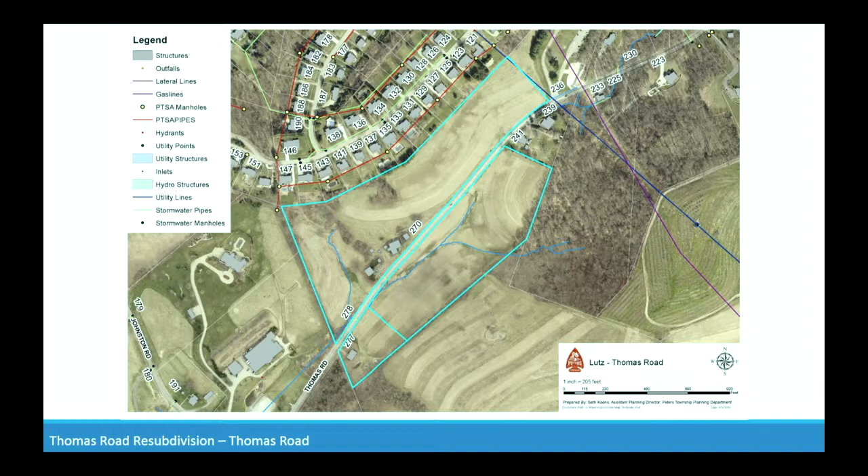Ted Taylor recently purchased the 27.75 acres. This property here, which is lot 2 on the plan, is owned by Wesley Lutz's daughter, Sandra Triplett. This plan simply combines 2 acres off of the larger Lutz tract with the former Wesley Lutz home. The plan is for that home to be torn down and a new home built on the resulting 4 acres.

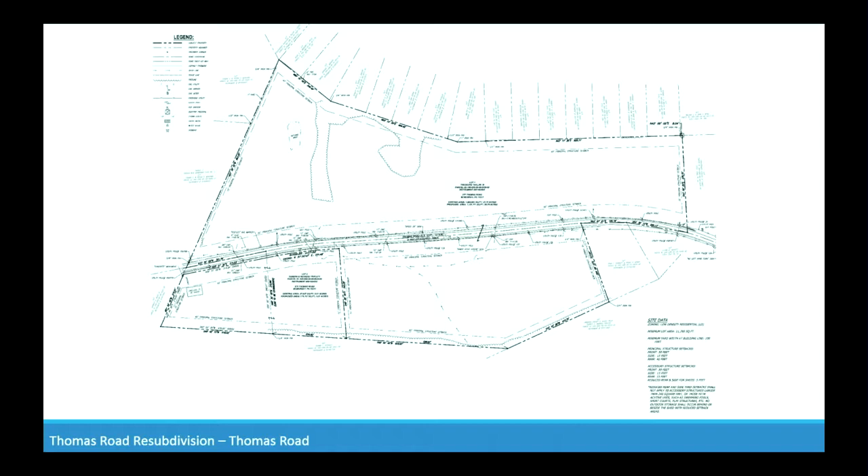Staff is recommending that the Planning Commission recommend council approve it, subject to the 8 conditions listed in my report.

Any audience comments on this matter? Any commissioners' comments? Are they going to continue to use a septic system, or do they have to tap into a pumping system? I think the plan at this point is to use the existing septic system, which has recently been checked out by the Washington County Sewage Council and found to be working properly.

But maybe Caleb or Mr. McLaughlin, who's here tonight, can say whether they plan on tapping that into the sewer. It sounds like it's working fine, but I don't know the answer to that. Did I answer it right? Yes. So there's no requirement that new construction means they have to tap in? No, as long as that existing system is working, they can continue to use it. Okay. But the future plan for the Ted Taylor property, is that serviced by sewage? That will have public sewer.

That will. Now, when that's created, could we require the new homeowner to get public sewer rather than a septic system? I don't know that we can require it, but there is a rule that if the new sewer comes within, I'll say 150 feet of the new home, then I think it's required to tap in. That's from the Peters Township sanitary code. Okay, gotcha.

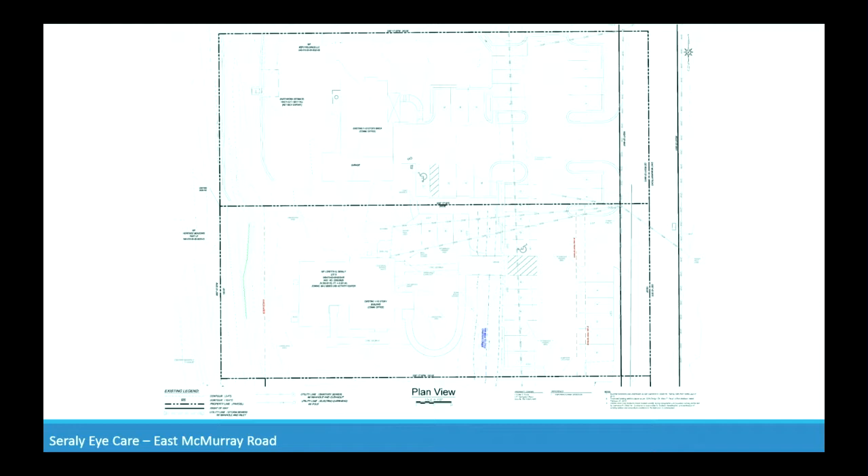There's a skin doctor and an eye care doctor located on the parcels. As you can see on the existing conditions plan, they're right up next to one another along East McMurray Road. We're looking here at this most northern parcel for the majority of this application.

What they're proposing is an expansion of the existing parking lot to allow for 9 additional parking spaces at 57 degrees along the backside of the building, with a buffer between the parking and the adjacent property line, which is also zoned mixed-use activity district. A little bit of that parking expansion would then cross over onto the address for 222 East McMurray and tie into their existing parking, creating a one-way circulation in this direction.

Staff is recommending approval of the application subject to our 10 conditions in the staff report. The applicant and their engineer received a copy of the review comments from Gateway Engineers as of this morning, so they have to look through those and finalize their plan per those comments. They've already addressed the majority of staff's comments based on the review letter we provided about a week ago, so we're moving right along with them, but we are recommending approval based on our 10 conditions. The applicant's engineer is here to answer any questions.

Wasn't it about a year or so ago, when Dr. Seraly was here? I apologize, I forgot to mention that. They did receive site plan approval for the parking lot expansion, with that date in October of 2016. That approval expired, so effectively nothing proceeded from when Dr. Seraly was here — correct, this is just resuming what he started. It never effectively got done, so this is a reapproval with some minor changes.

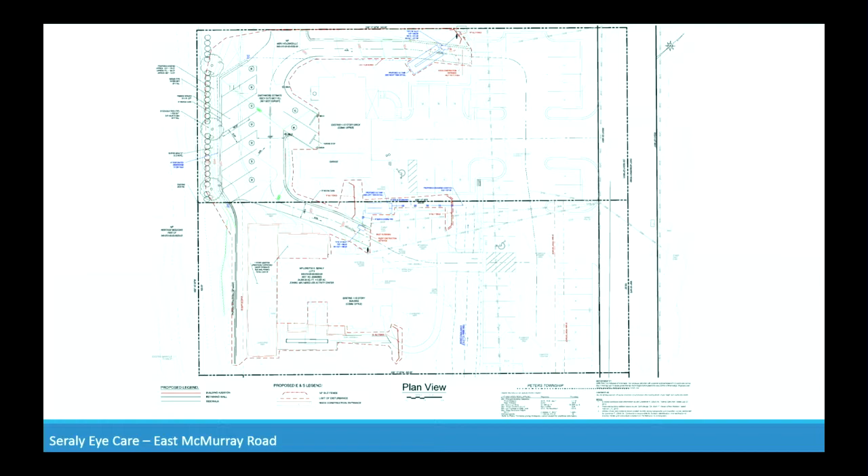Any other questions for me about the layout? The angled parking spaces, I think they're 9 by 15, 57 degrees. Is that correct size for our ordinance? On the initial plan, they were labeled at 9 by 15. They would comply, they're the 9 by 18. They meet our ordinance requirements.

And then the directional signage, is that subject to your approval? If you'll add it, then you can approve or deny that as well?

Correct. And then the 2 storm systems, were they new or were they rehabbed? They do not exist right now. They were on the original plan we got approved a year ago. We've just upsized them basically because we're handling some more areas.

Another note, we did secure a GP for the outfall on the southern tank last year, so we do have that in hand. And as of last week, I got a verbal from the Conservation District. They've approved the E&S. They asked for one more final copy of the set, so I should have that letter for you shortly.

Are you over an acre of disturbance? You're 0.51, 0.52, but no, we're well under an acre of disturbance. Yeah, and we've even included the building addition in the area of disturbance because it's happening at the same time.

Any other questions? Comments? Audience comments? Hearing none, you have a motion.

I'll make a motion that the Seraly parking lot expansion be approved according to staff's memo dated June 5th, 2019. I'll second. All in favor? Aye. Very good.

Talked about the open space. There are 2 stormwater management facilities proposed - one down close to Churchill Road and one over on the south side of the plan. Those 2 facilities will be detention facilities, they'll only have water in rain events, and they'll be turned over to the township for ownership and maintenance responsibilities.

The Westbury plan is in the Peters Creek Sanitary Authority watershed. There will be public sewer service to all the lots in the Westbury plan. The Township has approved their planning modules, and those are under review by the DEP.

I talked a bit about the geotechnical report. This is an area of Peters that has shallow mine cover, and we've worked hard with Gateway Engineers, our geotech engineer, who has worked with Westbury's geotechnical engineers, Murray Associates. I think we're all comfortable with how the site's being graded and where grouting will need to occur. There is a note on the final plan that will be recorded encouraging all future buyers to get mine subsidence insurance. Even I've learned that shallow cover or a lot of cover doesn't really matter - subsidence can occur anywhere.

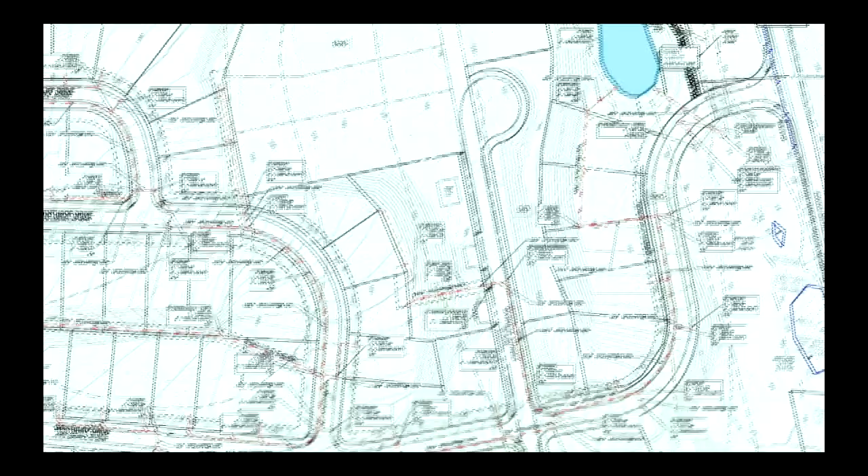Does that space have a parcel number on it? That's where it'll be - in this open space right in here. And tot lots are allowed to be within open space? Yes, just asking. We definitely encourage that.

So the area where there's going to be no houses built because of environmental purposes - how much of the open space does that take up? Is that half of it, a quarter? I'm just trying to figure out how much other space there is. It's probably a quarter of it, maybe slightly over, I'd say.

Will a school bus be able to navigate through the neighborhood? It could, but right now the idea is that the school bus will be just picking up at the end of Westbury and Churchill. The answer is yes, the school bus can.

Yes, through the plan, yes. But you're saying it will not. At this point in time, the school district is telling me they just want the school bus stop pad to be right there.

That's where they want the school bus stop to be. And how far is that for this house to walk? It's not that far, you know.

But it can, yeah, I mean it can. But that's in coordination with the school district, that's where they said it's going to be for now. School bus stops often change. Right now they're planning on right there, but I'm sure once the neighborhood's built out and parents get involved, they're gonna be picking up the kids at the door.

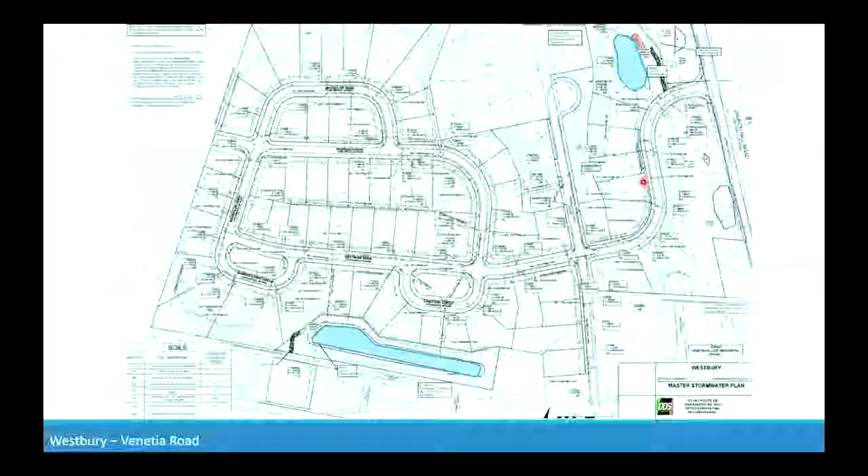And when you say the requirement now, just for my educational purposes, is 25% - is that 25% of usable land, or 25% gross of the tract that people could actually walk on? Gross, 25% gross. But the stormwater facilities can't be counted towards it. They can use steep slopes and wetlands as part of their open space, though.

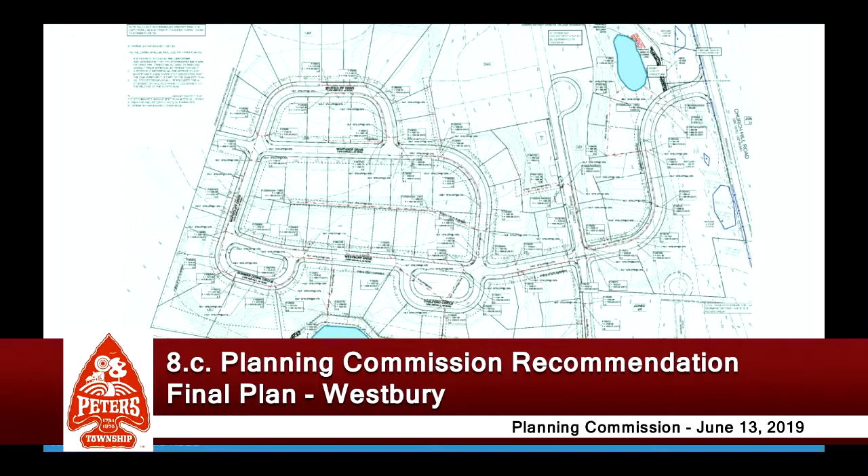What would you say the percentage of this 5.73 is actually usable, that people could actually walk on? I mean, most of it. That area down along Churchill, maybe not so much - but aside from that piece, the rest of it is usable. We have these nice areas here and here, and where the pond lot is, that's all usable - it's definitely functional space. And the open space down along Churchill is more for environmental protection.

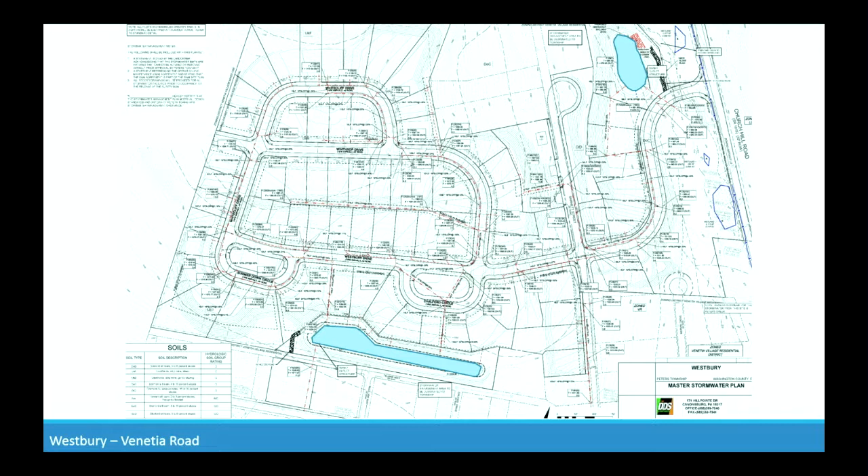Any other commissioner comments? Staff comments or audience comments? Hearing none, we have a motion.

I'll make a motion that the planning commission recommend the Westbury final plan and include with it the 15 conditions in the letter of June 7th. Second. All in favor? Aye. Very good. Thank you, guys.

That brings us to item D on new business, planning commission recommendation, T.A. Robinson Family LP variance. This is for the request of a drive-through in the Valley Brook Road mixed-use corridor, 330 Valley Brook Road.

I should just say on the record, I would have told somebody ahead of time, but I thought I was just acting as an alternate tonight. My law firm used to represent T.A. Robinson years ago. I don't think there's a conflict, but I just wanted to put it on the record if anybody is concerned about it. Thank you, Michelle. It was a number of years ago. Yeah.

So a little bit of a different item here. This application will be going before the zoning hearing board on Tuesday night. They're requesting a variance to allow for a drive-through as a permitted accessory use to what we refer to as a limited/counter service restaurant, more commonly like a cafe type use in our Valley Brook mixed-use corridor.

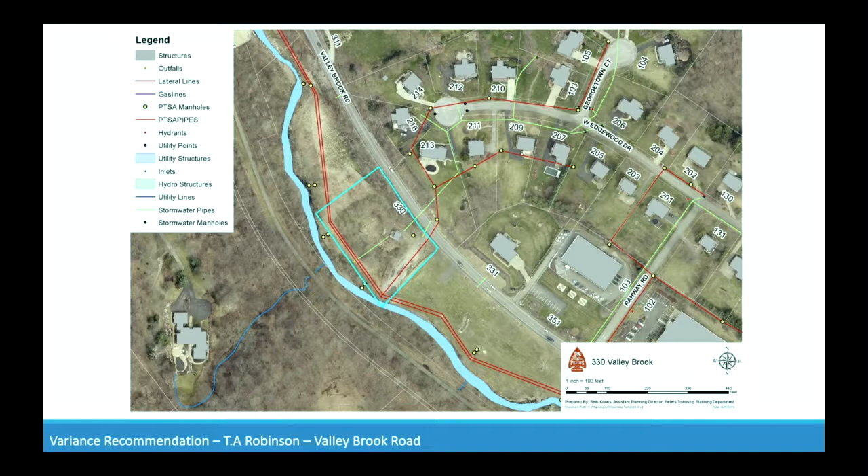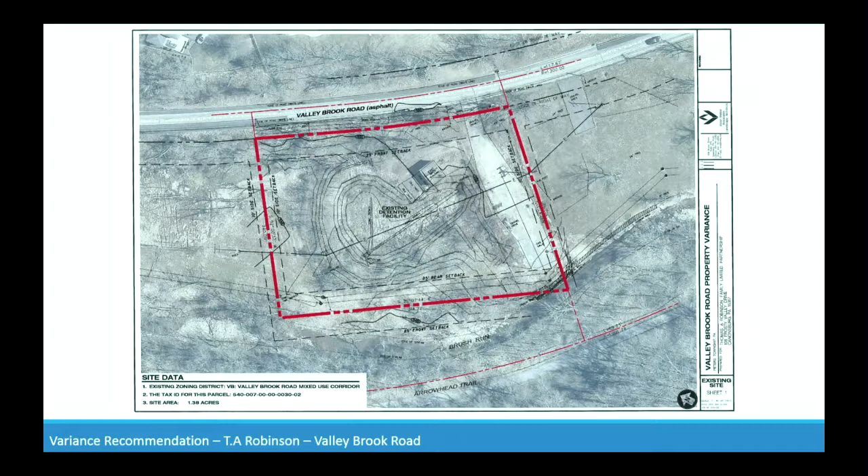Currently in our zoning ordinance, the only principal use that is permitted to have drive-throughs as an accessory in that district is a bank. This is on a piece of land owned by the township. The applicant, T.A. Robinson, recently entered a lease agreement with the township to develop this property for that use, specifically a cafe drive-through with trailhead access and parking for that trailhead access.

There is a large stormwater facility located on the site right now that restricts the development of the site pretty significantly. We feel as staff that the applicant has done a good job of addressing the design constraints of the site while accommodating for the drive-through and providing a high-quality development that doesn't have any negative impact on any surrounding properties or the character of the neighborhood.

Based on the design constraints, we're considering that the hardship on the site, which is one of the requirements to obtain the variance. Per the applicant, their claim is that the drive-through allows them to reduce the effective number of required spaces for the cafe itself, allowing for additional spaces to be utilized by trailhead patrons. But primarily as staff, we feel the design constraints of the site really present the hardship, and they've done a pretty significantly good job of addressing those constraints with the high-quality development.

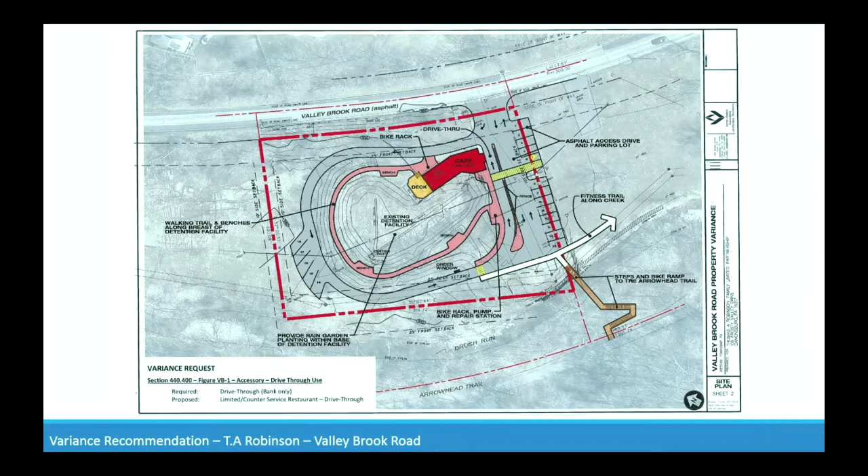The consultant for the applicant is here tonight. Staff is going to be recommending approval to the zoning hearing board on Tuesday night. You're more than welcome to provide your own recommendation to the zoning hearing board if you wish. But we just wanted to bring this before you as a matter of new development and a township-owned property in the township. So I'll hand it over to Mr. Wetzel.

They're going to be setting up our PowerPoint.

As Seth had mentioned, once again, my name is Mike Wetzel with the firm Victor Wetzel Associates, and I have Chris Pacadelis. We're here tonight representing Tom Robinson and the T.A. Robinson Family Limited Partnership, really for the concept plan review, as well as the variance request in regard to allowing a drive-through accessory window within the property.

As Seth had mentioned, in the 15, 16 months that Tom Robinson has been working with not only staff but also council in regard to a parcel owned by Peters Township that's used for a stormwater management facility within the township - Tom owns properties on both sides of the existing parcel, and what they've worked out since May 1st was an agreement to allow him to lease the property to do a small cafe on the site, with parking within the property and trailhead parking for the Arrowhead Trail.

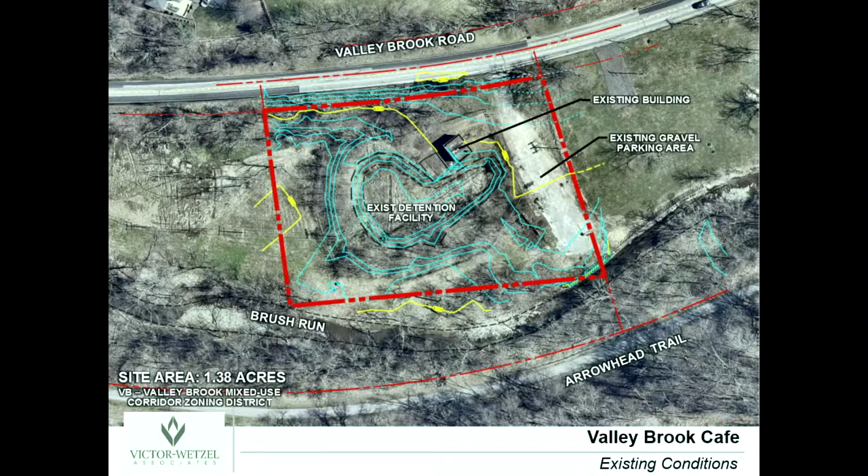Now, when we look at the site again through here, the high point is Valley Brook Road, drops in elevation down through this section all the way down to Brush Run. You can kind of see the outline of the detention facility through the 2-foot contour, and this is really the dam work or the breastwork associated within the site area. Contourized, once again, rising up in elevation, low point down along and through this area of the site.

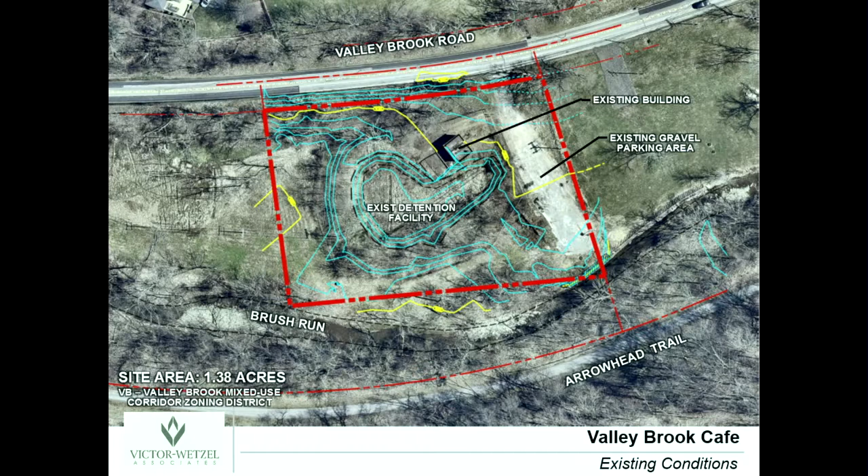And that detention facility is really more for the homes on top of the hill off of Valley Brook Road.

Does it ever fill up? No, to tell you the truth, there's really never any water that goes into the facility. There's a couple of concrete channels. There's an outfall pipe right along and through here, concrete channel and through here, another concrete channel. But there's really very little water that goes into this overall detention facility.

So you can kind of see it's an existing condition in regard to the site, really not created as a hardship by the now the leasee, with the township still owning the overall parcel. The idea was for Tom to take over this piece, maintain it as the character that he has, and really create a specialty little township scenario where you can get access to the Arrowhead Trail off of this piece and really provide a small little neighborhood cafe. Nowhere in regard to a Starbucks type of scenario, because they wanted to have it as more of a local flavor associated with the cafe in itself.

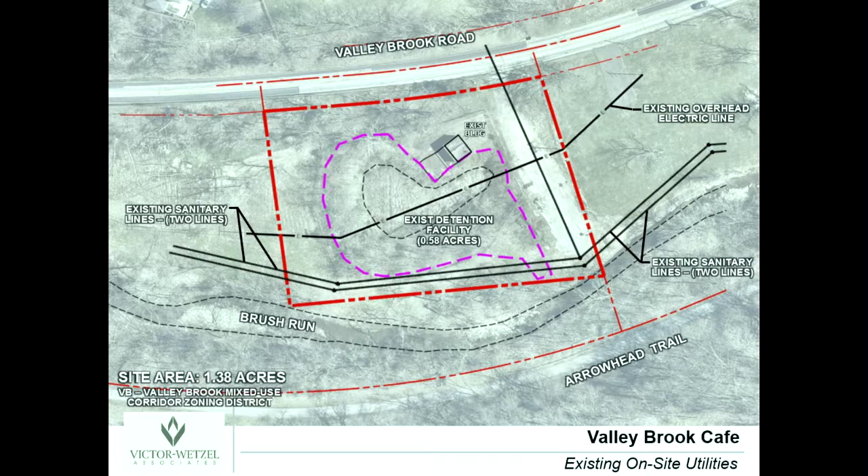The whole idea, once again, Tom, is to make this really more of a beautification associated with this area. And really what we'll end up doing, as you've probably already seen driving through, he's already started cleaning up the site, removing a lot of the weed and junk trees and shrubs.

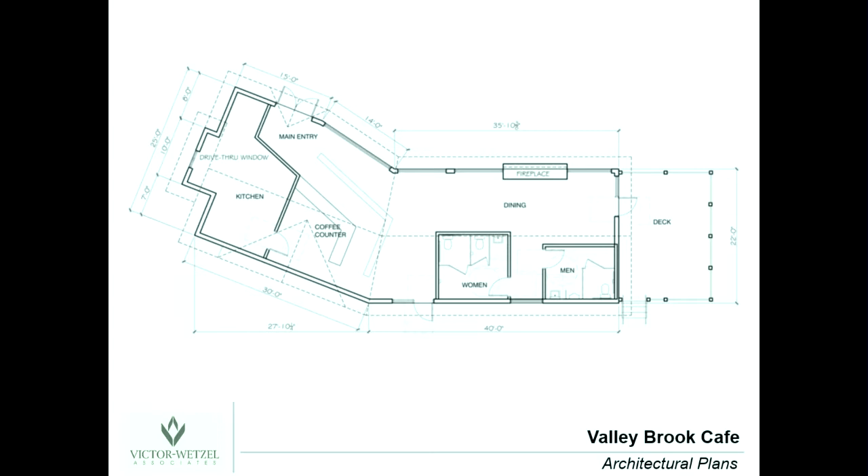This would be the deck area looking out over the detention facility, and then once again this is the drive-through, with its mixture of getting away from the box, providing some very unique roof lines, coverings over the pickup window itself.

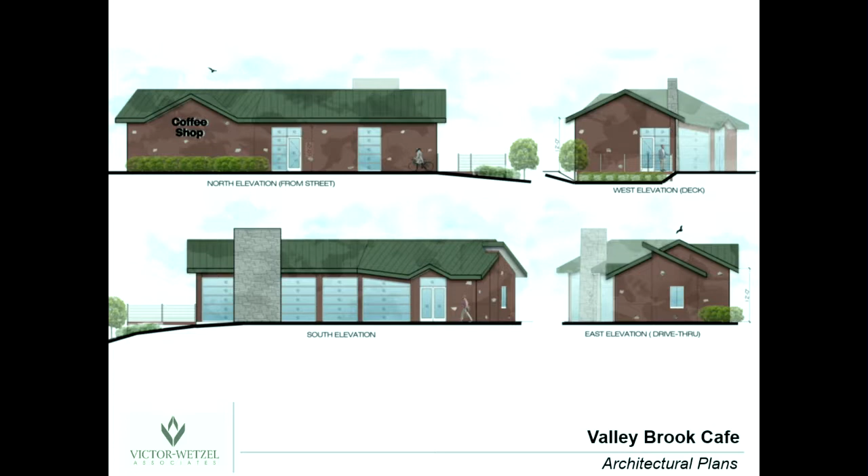So with that all said, what we're looking at is going to the zoning hearing board for a variance in regard to section 440.400, figure VB-1, accessory drive-through use. As required, only a bank is permitted to have a drive-through use within the site. We're proposing for our limited/counter service restaurant site to have that drive-through.

Once again, located through here, so it's not facing Valley Brook Road associated with this plan. Our hardship is, once again, the location of the detention facility and how much land that is actually taking up, and really what's available to actually put in the building. So we're working with that in regard to the plan.

We also have, with that, it will limit the amount of parking that would be needed to actually go into the cafe for people using Valley Brook Road within this mixed-use corridor, leaving that parking associated with the trailhead area. As we presented through the plan and highlighted from staff's comments, the variance will not alter the essential character of the neighborhood or the district, and the proposed drive-through window will not face towards Valley Brook Road.

So once again, we're showing you this concept plan and looking at your recommendation in regard to the variance request to the zoning hearing board next week.

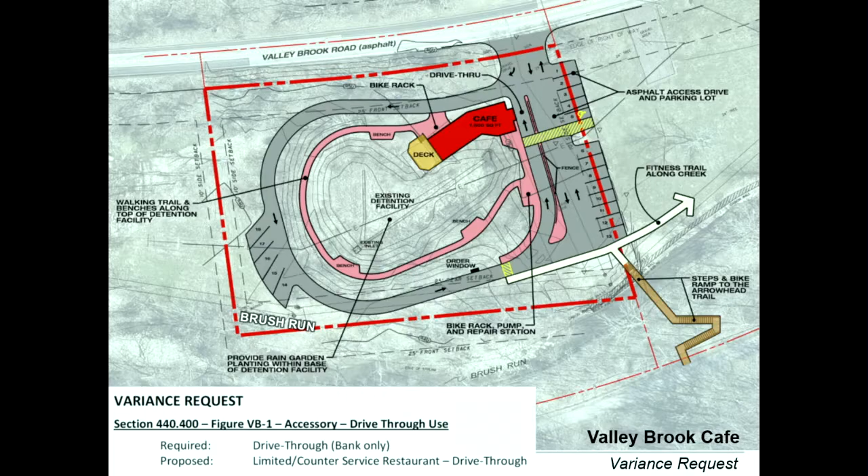The second thing I have a fundamental problem with is the township's thoughts of leasing a property like this. Why would we not just convey it and sell it? We're not allowed. The liability on this site's going to be huge. If we look at the lease, it's only like a $1 million liability policy.

I mean, you got the bridge issues, you got pipes, you got cars going through there. This could be a lot of problems for the township. We looked at that, and it was very restrictive to sell, and that's why we went through the lease.

Can you expand on that at all? So, yeah, hang on one second. Can you go back to the slide that shows the overall picture? Neighborhood? Keep going, keep going. Yeah, thanks, okay, that's fine.

All right, so, yes, my name's Chris Pasadelis. I represent T.A. Robinson Family Limited Partnership.

This whole process began initially when it became apparent, when Tom was looking at a separate development, that there was an interesting need of the township to own a piece of property that Tom owned. So I don't have the pointer, but if you look, all right, thank you. This property here is owned by the Robinson Family Limited Partnership, and it comes around here, and then it goes back here, and it goes around in this area here.

There are certain needs or certain issues related to - I don't have an exact off the top of my head - the streams, I can't remember. Erosion and sedimentation control, yeah, that's exactly it. MS4 station, stormwater, and some DEP requirements - there was a need also for perhaps Peters Township to own this piece here. It would benefit them because it's along this stream bed here.

And so there was conversation about Tom selling or swapping this property here in exchange for this property here. And part of the consideration would be that Tom would restore this retention pond and turn it into something a little bit more appealing.

We went through that process and ran into issues associated with the Donated or Dedicated Property Act, where it really wasn't a possibility for the township to sell that piece of property. But it was a requirement that Tom Robinson donate this property over here.

So in working through the process, we came up with a lease instead, a very long-term lease, where as part of our desire to beautify the property, initially this was designed to create access over to Arrowhead Trail, create parking for people who wanted to use it, to create a repair station. That building that's on the property now is in really poor condition, so maybe restore that building in some way. And the investment is way in excess of $250,000 to do all of this.

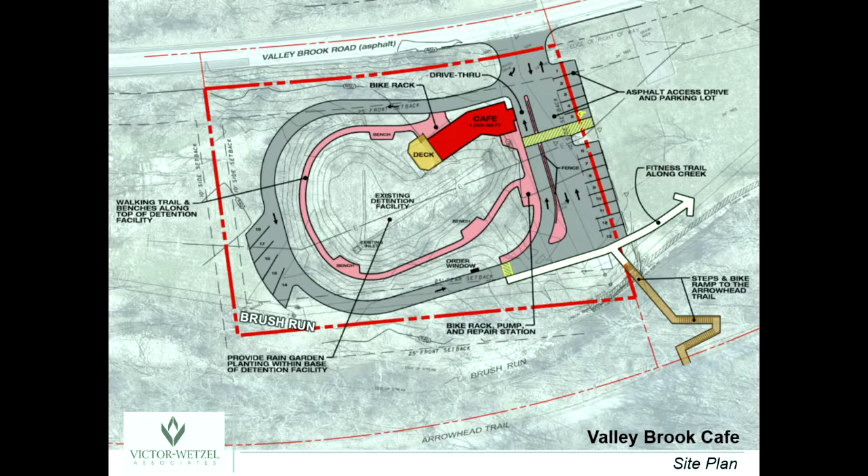If we make a recommendation to approve the drive-through, it then goes to the zoning board next week. After that, they would prepare the final site plans. Does it come back to us? Yes, then it stops. Oh, that's it? Stops. Done. So council doesn't have to approve it. Correct - that's why this is a good one.

And we've got five critiques of the site plan right now, so do you think that language protects us enough and gives us the authority to chew through these elements that may otherwise not be nuanced in the code? Yeah, the goal was always that if we would shoot it down and they appealed, we would have broad enough language - they would say we met the code, and you guys can impose additional conditions.

That's correct. Right, perfect. And even through comments from yourselves, we'd still come back to staff and township consultants to review the site plans before it got into much more detail, so there's going to be a lot of communication, especially with staff. And then, regarding this plan...

Are we ready to do this? May I have a motion? So I will recommend approval of the variance requested by the Thompson Robinson Family Limited Partnership.